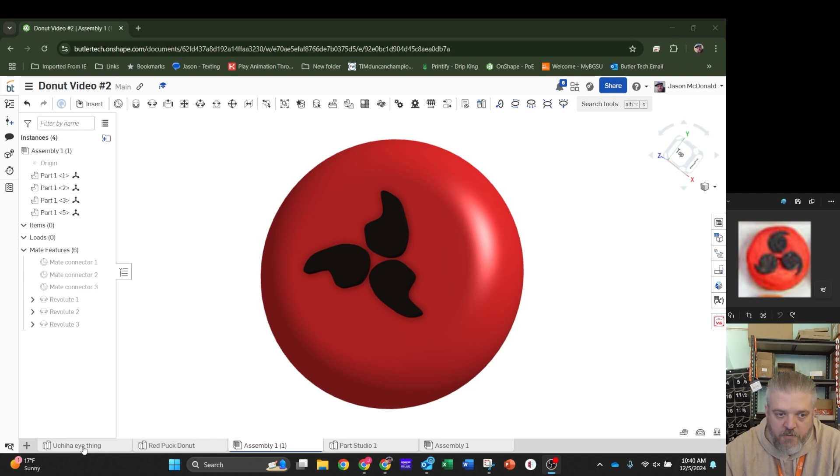So, as you can see in the picture here above my head, we've got the example donut. And this is what it's going to look like. So hopefully at the end we get there again. So I've copied some of this student's parts over, but I'm going to walk through how to create the eyepiece. The donut itself, pretty simple. It's just a circle extrusion.

So I'm going to start with a new part studio. I'm going to go from the top down. We're going to walk through the image trace with a real example here. So sketch, top face, go to the image, insert image feature, import, I got a bunch of stuff, download, brought in the picture of the Uchiha eye donut, probably butchered the pronunciation of that, apologies.

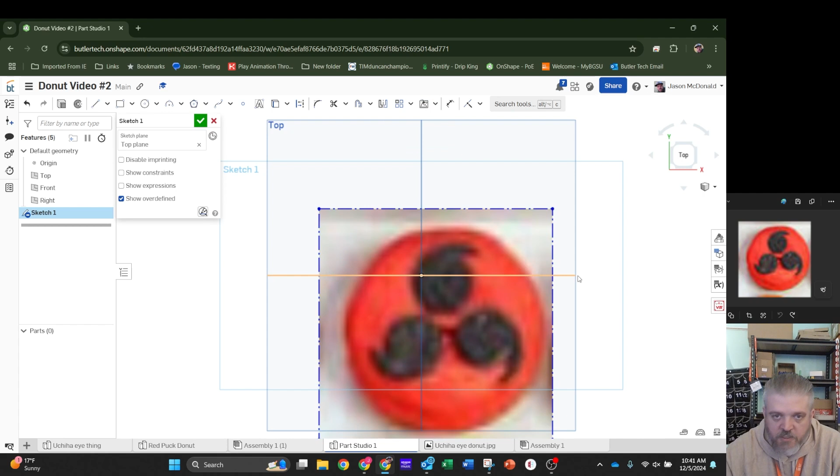I'm going to click on the image now that it's in. I'm going to get rid of this little information. Now it's asking me to draw an image rectangle, so we'll draw it nice and big. It's a little blurry, not really worried about that, I just need something to sketch. So that's in my first sketch. Now I'm going to create another sketch on the top plane. And now I'm going to trace my shape. So in this case, I'm just trying to create the little black eyepiece.

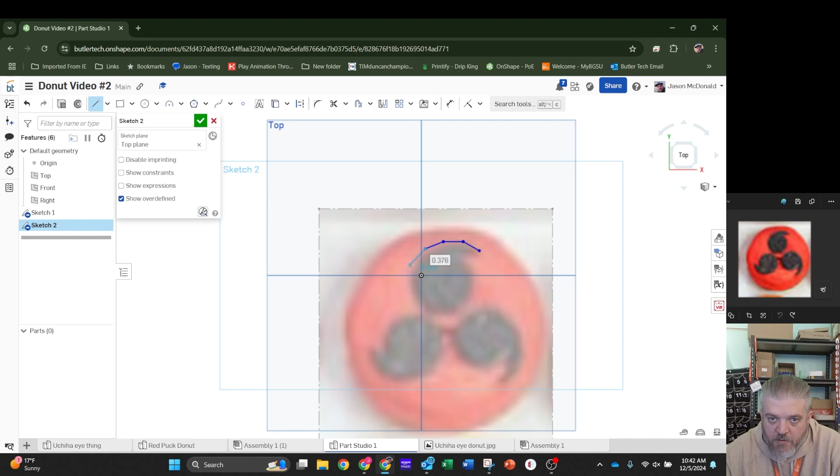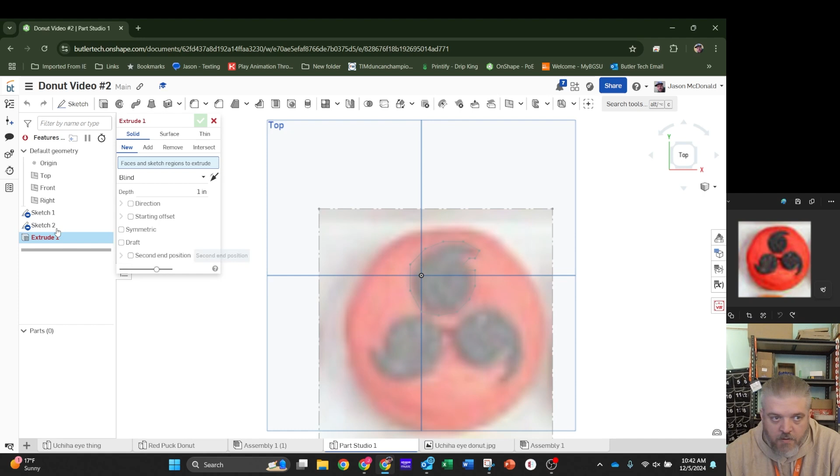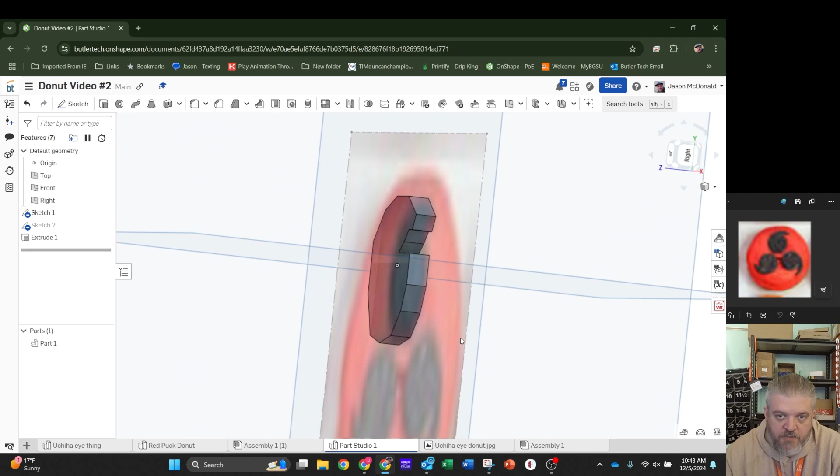In this case, little piece. I can add appearance to it, make it black in this case. So, kind of gives it the shape. If I wanted to make it a little bit better, I could use different shape tools. I could sketch again on the top face. A lot of this is round, so let's start with a 3-point arc. So we got, kind of starts here, goes over towards here.

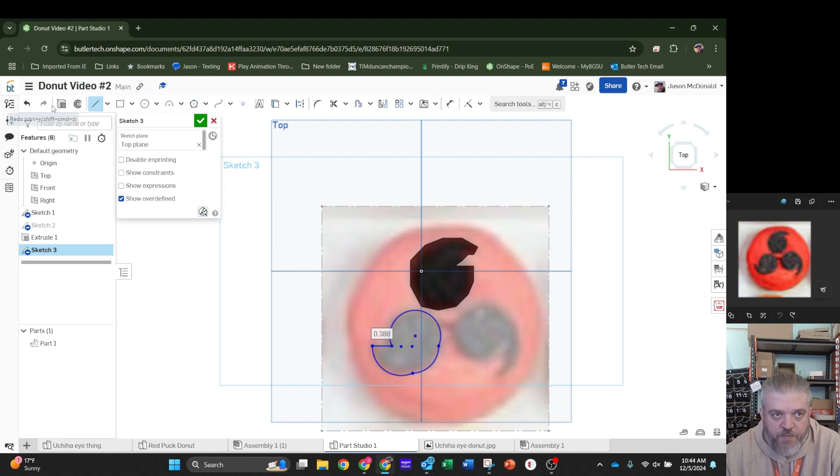That's pretty good. I've also got kind of a 3-point arc that goes from here, say to here, and then this little bit's a line, then extrude that. Again, you get the general gist.

So the darker the picture, the better the picture, the easier it is to trace. You know, I could probably smooth that out a little bit if I took some time and really got into it. But that's the purpose of the image insert, and then using the lines and the different sketch shape tools to kind of make that. I could have created a circle since it's a circle, and then maybe created the rest of it. I could have used the spline tool, etc. For our case, I'm just going to leave that.

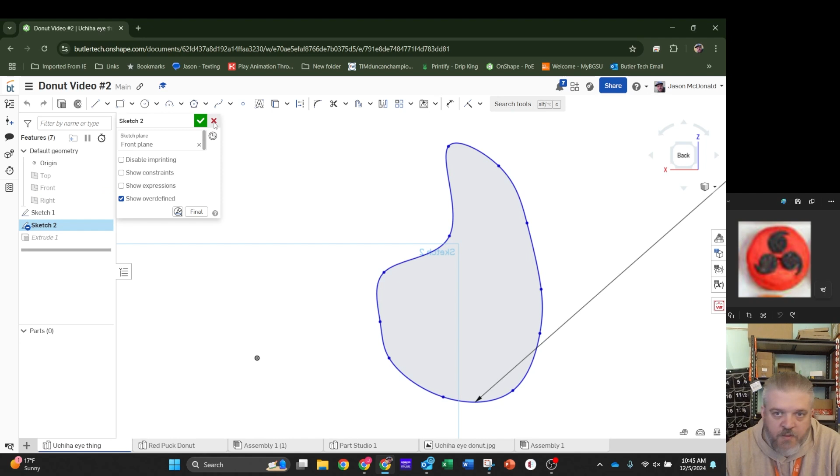I'm going to use our student's one that he drew. You can see it's got a little bit better shape probably than mine. Looks like if I click on his sketch, he did some lines and some splines to get there. So did a nice job. Alright, so that's the image trace.

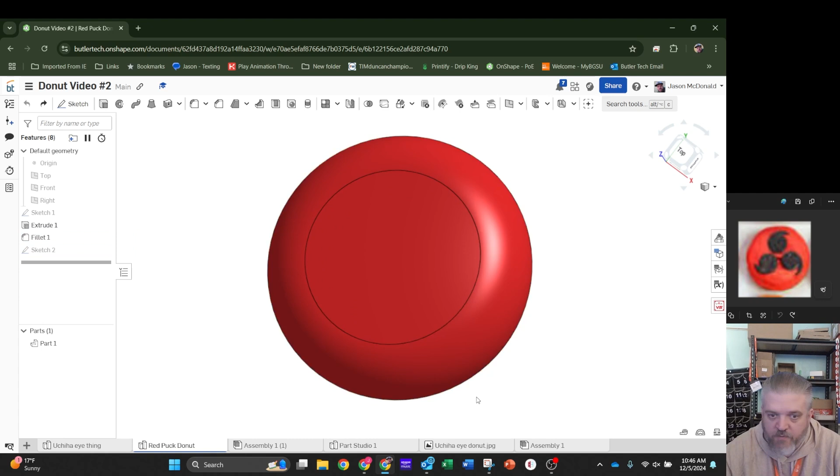Alright, red donut. So in our example here, we've got our red donut. You can see it started out as a circle, has a little bit of a fillet to it on the edge. All tools you've seen before. If we just want to run through it real quick. Create a new part studio. Again, top down, sketch, top, circle tool. None of this should be new for y'all. We're going to go 2.5 inches just to give it a shape and a size.

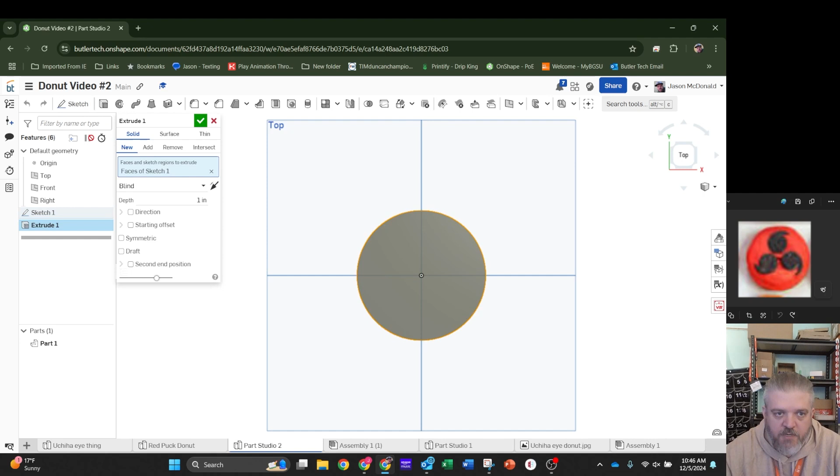We're going to extrude that to give it its 3D dimension. We'll go 1.5 inches. Make it look kind of puckish. There we go. And then to give it the rounded off, we're going to fillet or fillet the edges. I hear it both ways. Doesn't really have quite that donut shape right now. It looks more like a hockey puck.

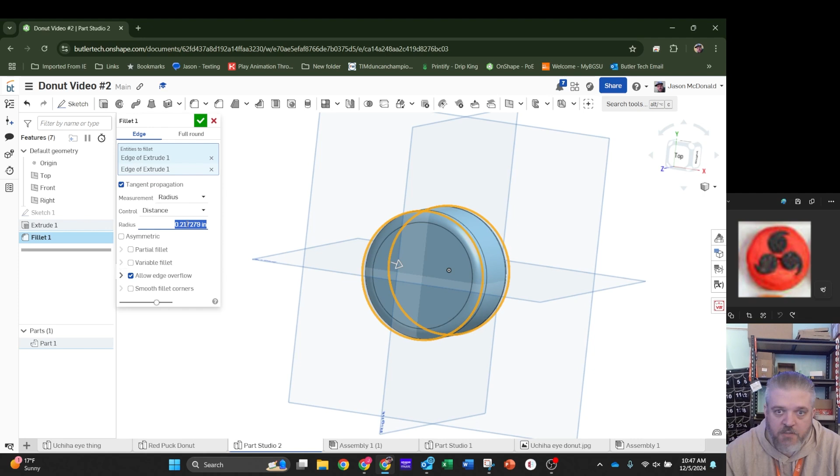So if we go a little bit bigger, the donut was 1.5 inches. So if I go 0.75, let's see what that looks like. Might be too big, or you know what? Give it a.

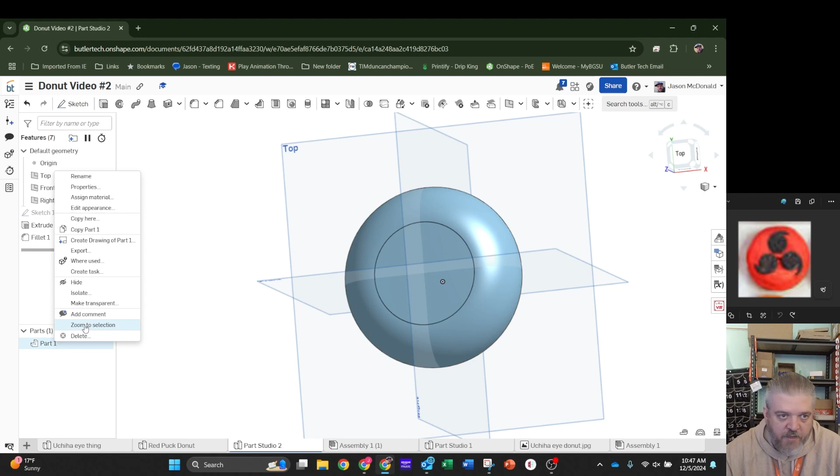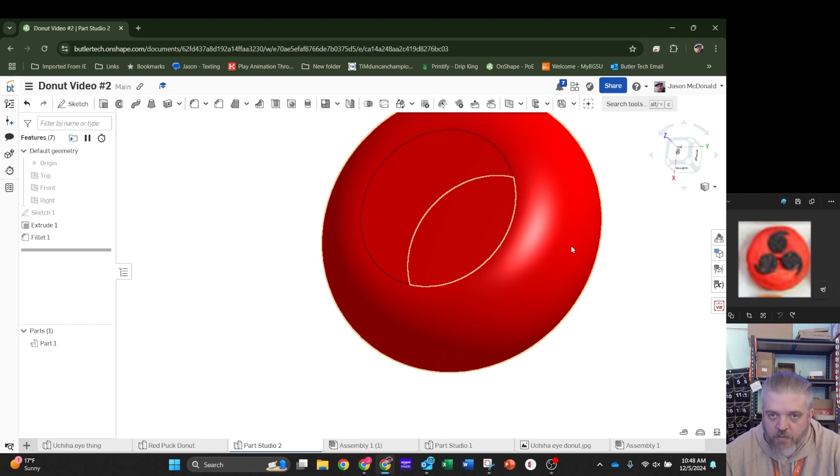So one of the questions I also get a lot is, hey, I'm trying to add this to my professional looking presentation. And while this is good for CAD, seeing the different lines and parts of it, how can I, one, either view this as an isometric, or view this without the lines between the different faces or components or features, the different geometries? We have this button right here, our camera and render options.

So one question I've gotten a couple times this week, how do I make it look isometric like when we were in our notebooks? So that kind of spins it to our XYZ isometric view. Now since I didn't really create it in a good fashion for an isometric view, maybe you might want more like that or like that. Still got to 3D spin it, or use your right click and spin it around.

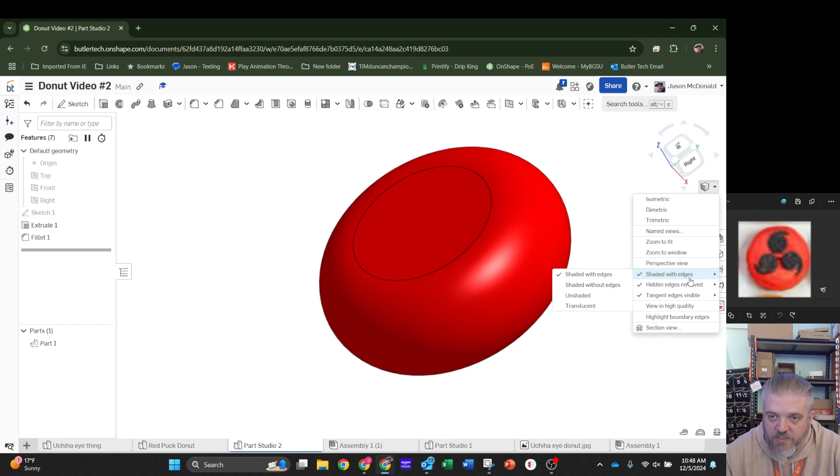In order to get rid of these lines and make it just a solid shape, if I go into render options, I can then go down here to where it currently says shaded with edges. If I go shaded without edges, it gets rid of those lines.

Alright, I'm going to pause here for a second and I'll be back in a minute.

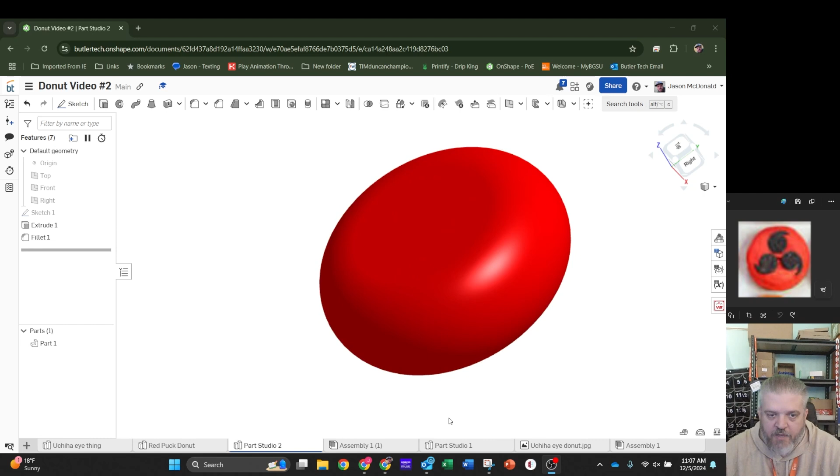Alright, I'm back. So the next part of this, we've got our red puck, we've got our black eye piece that we need to add to it. So how do we go ahead and get it on the donut? So I'm going to go to our assembly tab. We did something similar to this with our puzzle cubes earlier. So I'm going to create the red puck donut, drop it in. We're going to add in our 3 eye things.

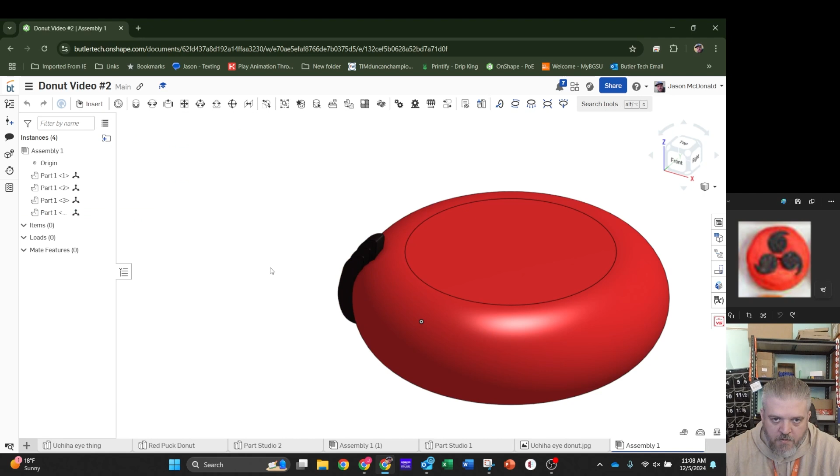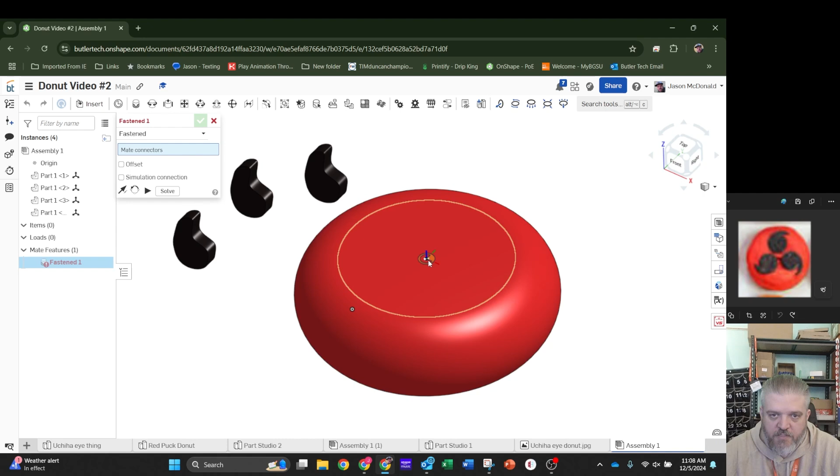So I showed this the other day, how to add mate points. But here's kind of a real world example. So in this case, this face here, which is where we're looking to add our eye things to, so we can get the shape that's above my head, only has 1 mate point right in the middle, as well as on the edge. So if I were to try to mate it, I'll just click fasten mate. If I click on here, you'll see just the 1 mate point in the middle of it.

So one thing I do want to call out, we're also going to learn a new mate with this. So there's fasten mate, which is what we've used before. It removes, like it says there, all degrees of freedom between 2 entities. So if I add that eye and put it on the face of that donut, they can't move. So wherever it goes, it's stuck.

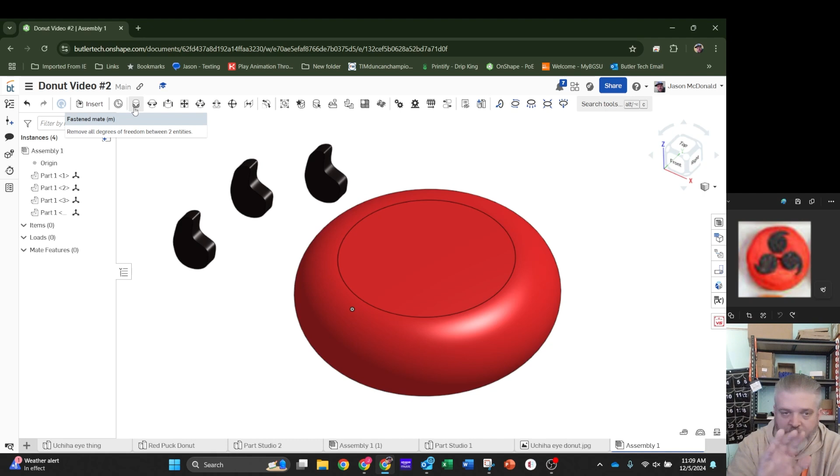Now say when I add it, I want to spin the eye a little bit to give it that 360 kind of spinning wheel image that's above my head. What I want to use there instead is right next to it, this Revolute Mate. And so that allows, again, what it's saying, rotation about the z-axis. So putting it in, it spins across the face of the donut so you can line them up.

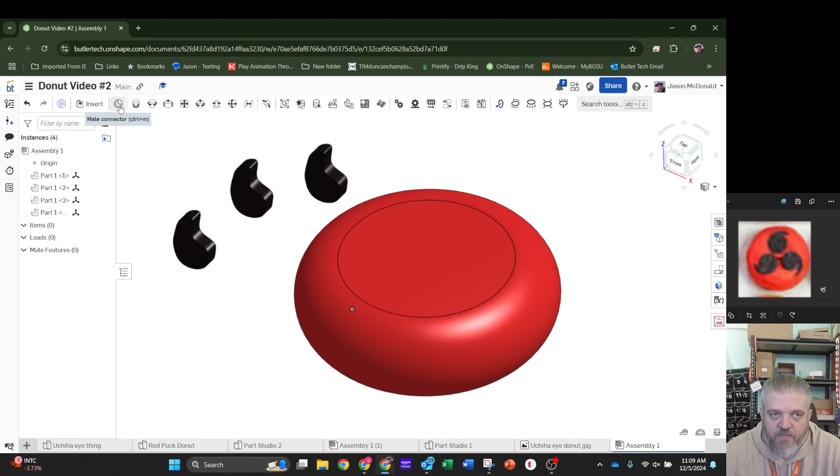So we're going to be using this, but first we also need to add our mate connectors. So I'm going to want 3 of them on the face of this donut, so I'm going to spin this to the top. I've already clicked my mate connector button. I'm going to do it on the entity, which is this face here. On entity. There we go. Sorry, Onshape's going a little slow today. So on the face of part 1, I want to move it.

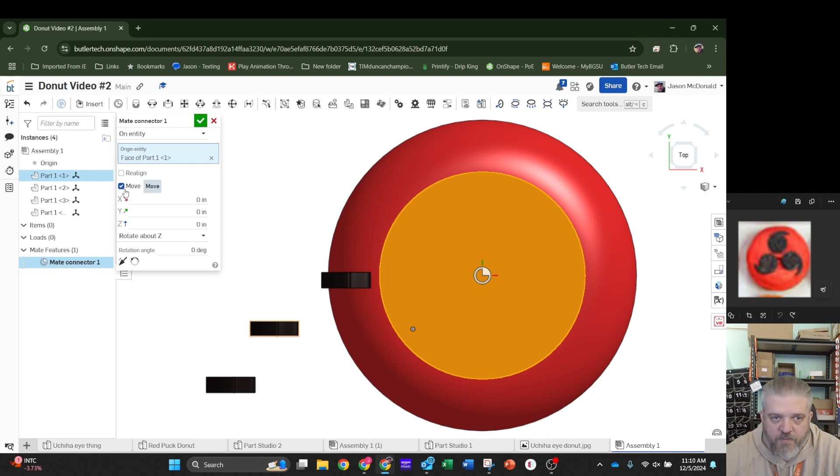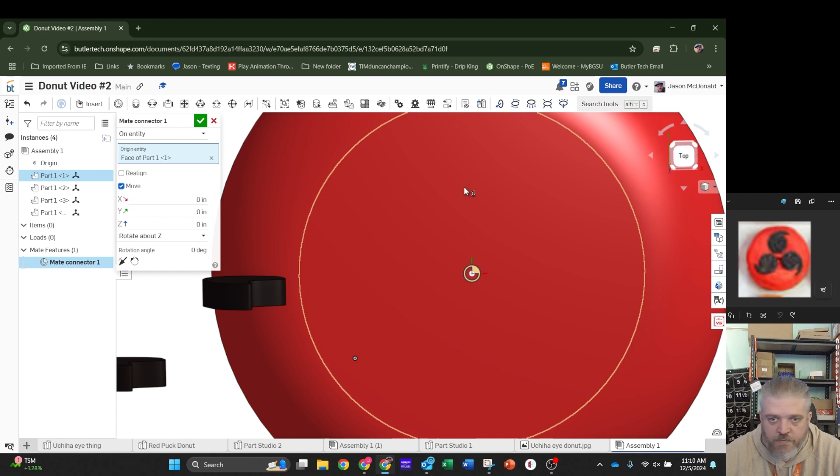So again, it's hard to see because I've got a red donut, but our x-axis is the red, our y-axis is the green. You don't see the z because it's coming straight at me, but if I were to spin it, you get a little bit of it. So I'm going to put this one kind of out in here. Or no, we're going to go straight up for the first one. So straight up the y-axis, we're going to just try 3 inches.

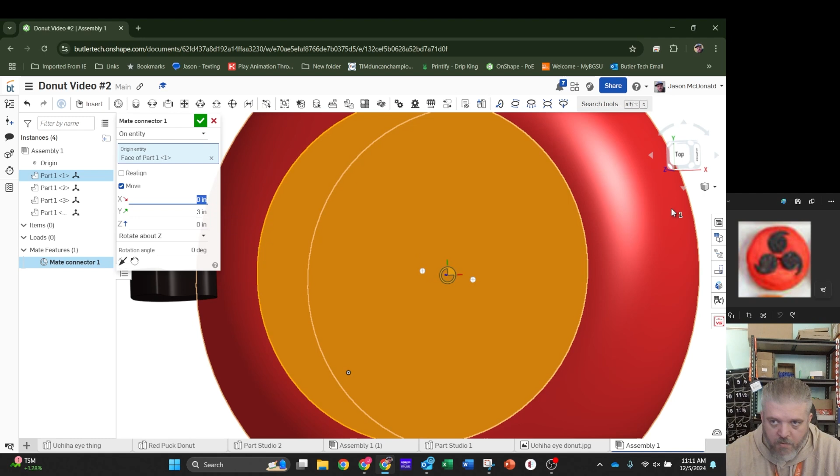There we go. Try 0.3. Let's go 0.5. That should probably be a little bit too far. We'll go 0.4. So that's 1. Let's add a second. Again, on the face.

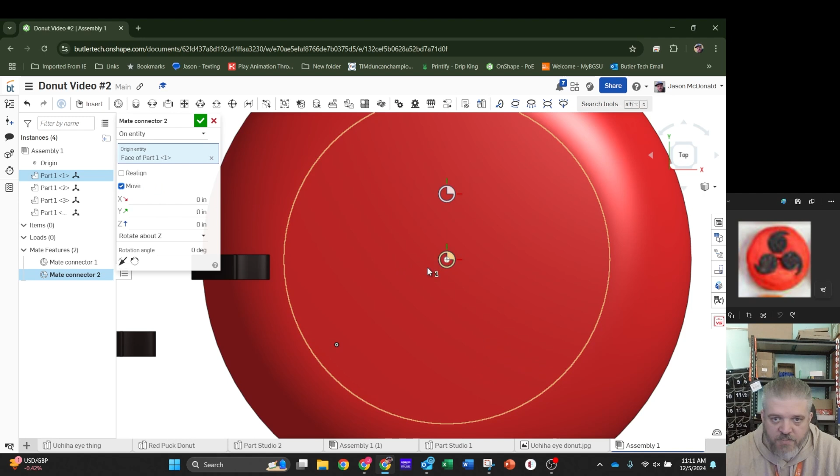Not on the edge, we want it on the face. Face of part 1. I want to move it, so this one's going to go down in this direction. So we're going to go negative 0.35, and we'll go negative 0.35 here. Probably good for now. We'll go ahead and green check that.

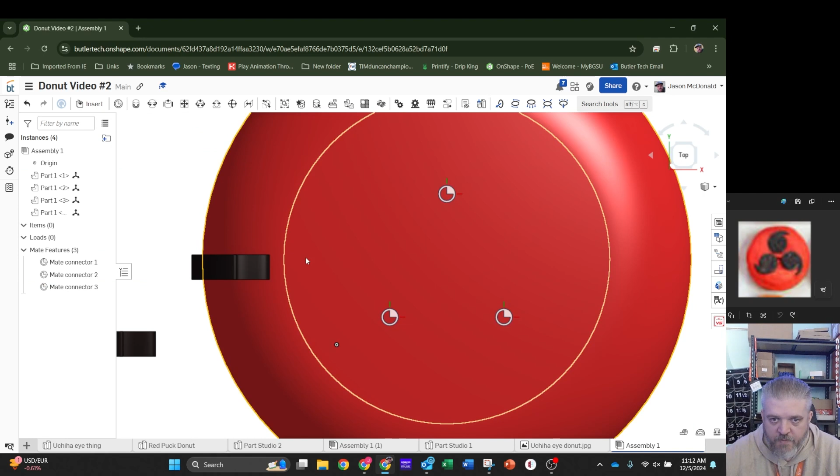Add another one on the face. Move. Again, down a negative 0.35. In this case, we're going to go 0.35. Probably good. Alright, so now we got our mate points on the face of the donut. We're going to see if this worked. So we're going to Revolute Mate this time. We're going to go face of the donut, side.

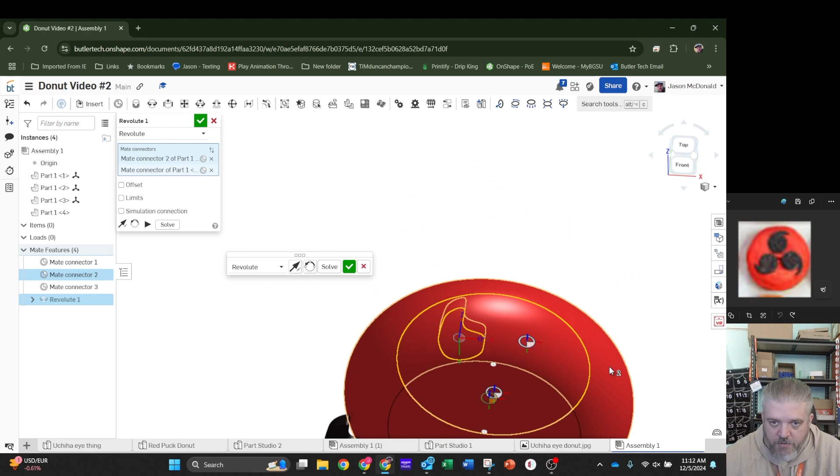Since we can't see it, it went inside, we're going to flip that out. Again, hard to see. There we go, and we're going to green check it. So now if I bring my donut back, we got one locked in place.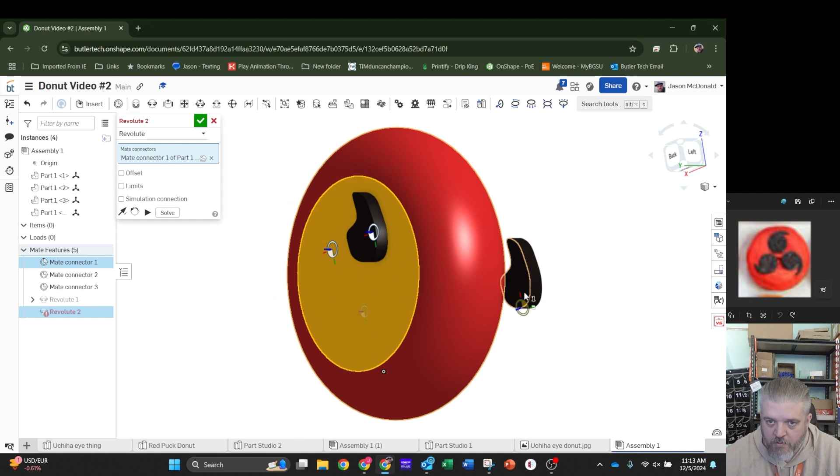We're going to go ahead and do the second one. So Revolute Mate the second one with the face of that donut, or the face of that eye patch part. Get them to where they stick out. There we go. And now Revolute Mate 3, where's part 3? Hard to find. We'll find them here in a second. Right in the middle of that circle.

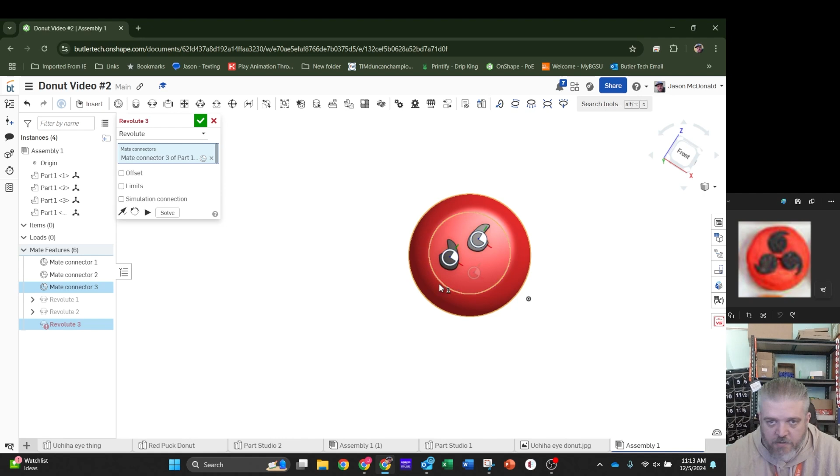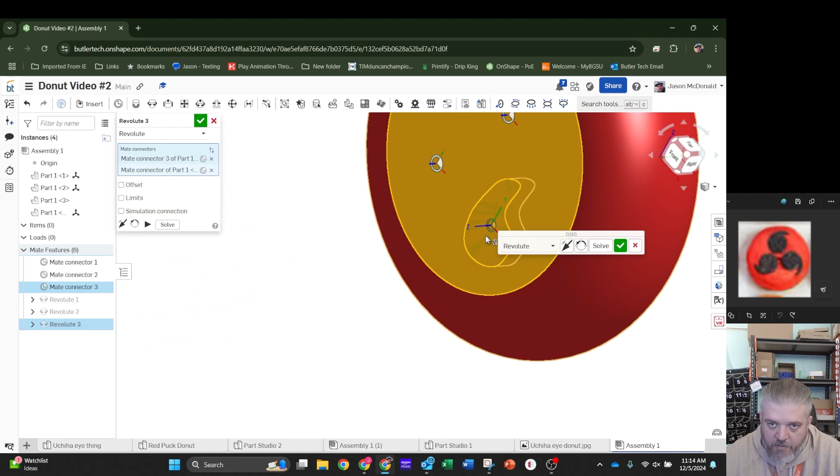And what? He's inside the donut. Alright. Let's red X this. Let's move this donut out of the way so we can get to him. Revolute Mate. Click there. Click in the middle of the donut, or the middle of that part. Flip it out so it's visible. Green check. Alright. We're getting closer.

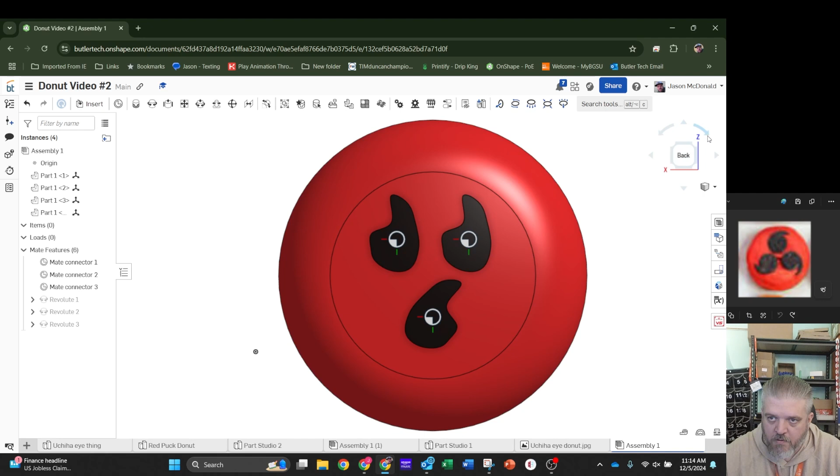So, we at least have them all. They're all connected, but they're not in the right area. This middle piece kind of goes towards the inside, and they all kind of face outwards. I've got it upside down, so let's rotate this. One more time. There we go.

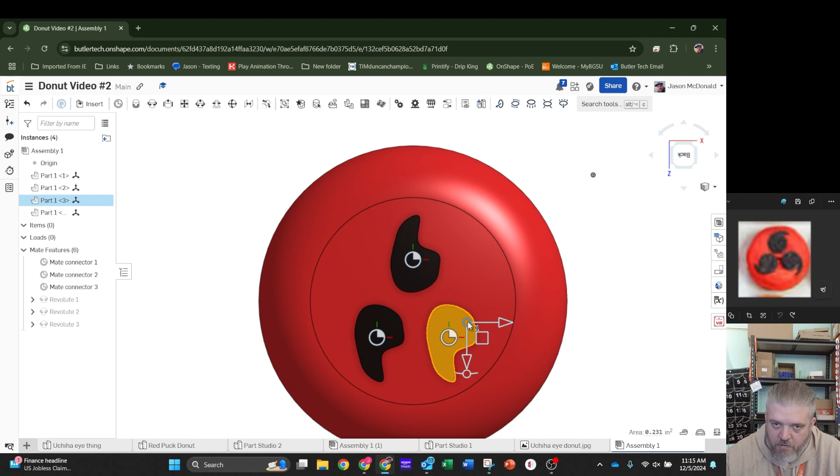So if I now click on the individual part, I get my white arrows. I can now transform it. This one kind of looks more vertical. And last but not least, this one here.

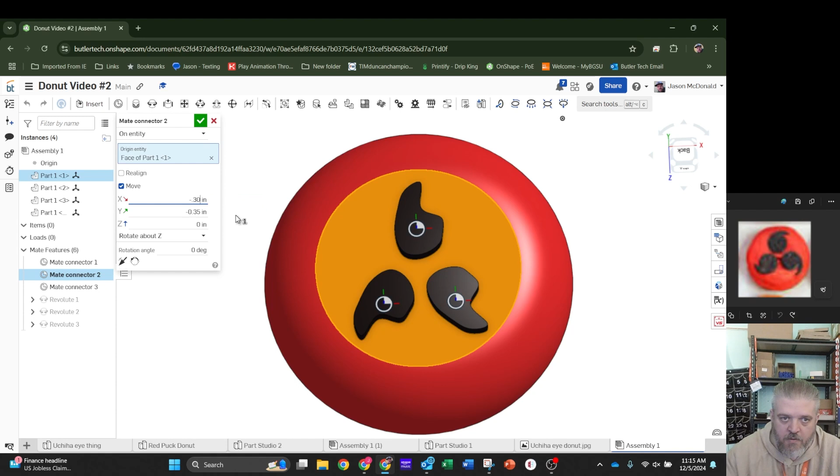There we go. Now for whatever reason, I didn't like exactly where they lined up. Maybe I wanted to move them a little bit. If I just go back to the original Mate connector point, so say I wanted to move that top one down a little bit, or if I wanted to move this one up a little bit, I can just change this. Bring them in a little bit closer. And then because I did the one, just to keep it symmetrical.

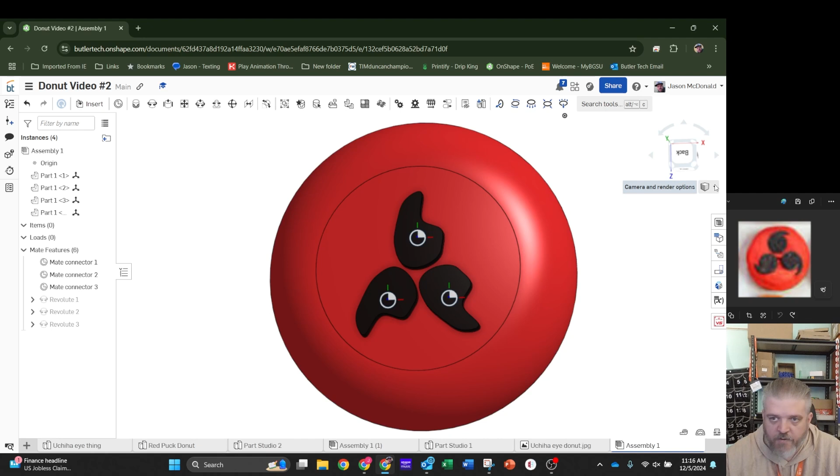I could do like that, and then at that point maybe the top one's off a little bit. So instead of 0.4, change that to 0.3. And then if we wanted to get rid of those lines again, click on the rendering options, shaded without edges. And there we go. We got our red donut with our 3 eyes.

And we can go back to the Part Studios and change dimensions a little bit if we want to make the eyes bigger, the donut smaller, to dial it in just a little bit better. But as it is, great donut, great choice, very nice job.

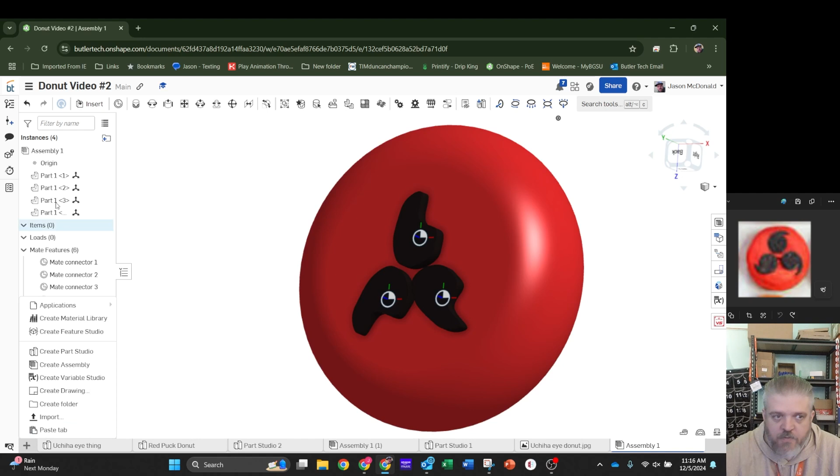So, last skill to show. One of your students today asked about how to create a cone-shaped donut. So I'll show this again. This is the skill we did with our D&D or tabletop dice. So pretty quick. Like always, start a sketch, go to the top, use a point, make a point.

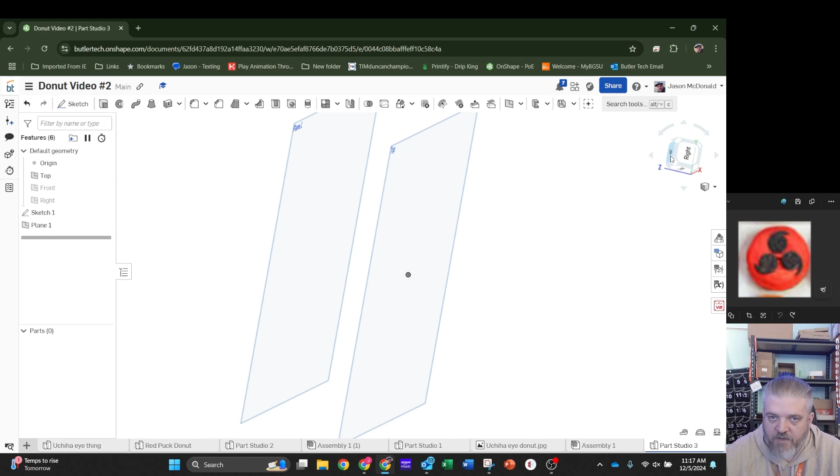Done with that plane, we're going to create an offset plane from the top. We're going to make it, in this case, 2 inches. So now I've got 2 planes. I'm going to hide the front and the right. So now if I click on the top, give it that top-down view again, create a sketch here on plane 1.

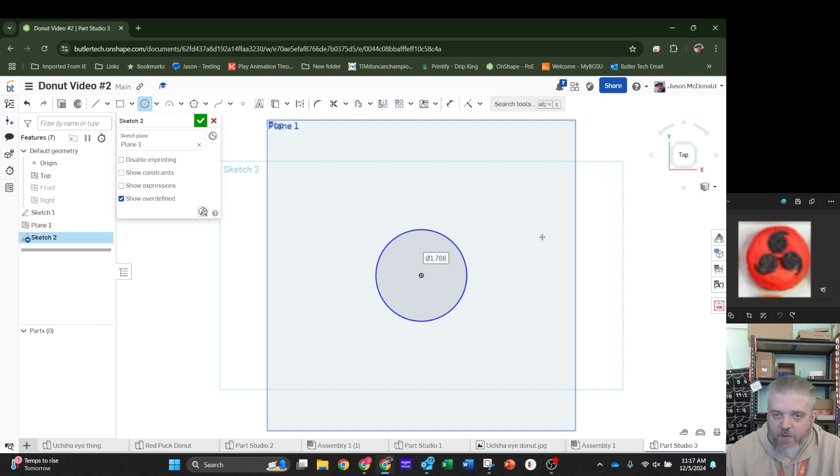In this case, a circle. Since it's a center point circle, I'd start right at the origin or right at the dot that I created for the first one. Say I want the top of that donut to be 2 inches, I can just drag it out. Right now, while the text box is there, type in my 2. Got a 2-inch donut, so now I've got a point and a circle on the other end.

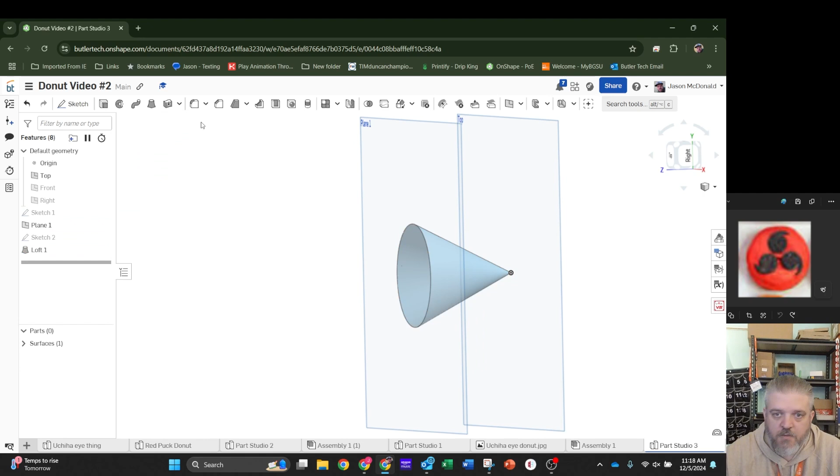Done with my sketch. Now I'm going to loft the two. Loft from the dot to the circle. Could have gone in either direction. As a matter of fact, I ended up going the opposite of what I just said. There is our cone shape. Oh, and I lofted that as a surface, not as a solid. So let's do it again to give it that solid view.

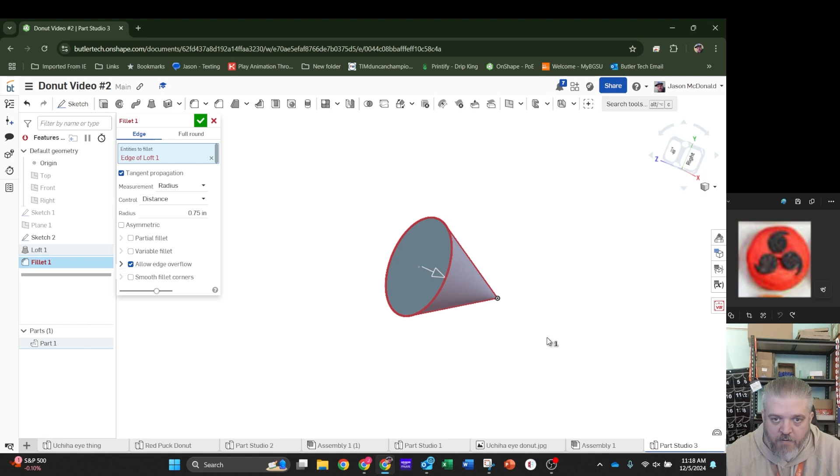Now in this case, again, making a donut. Let's hide our planes. Want to give it that rounded filleted edge. Round. Hide that sketch, there you go. Got a kind of a rounded donut shape there.

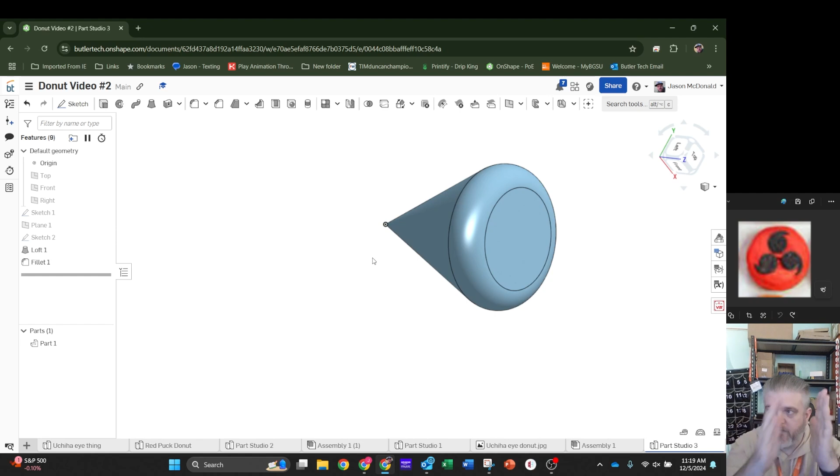So it's as simple as making a circle and a dot on two separate planes that are offset from each other, so they're still parallel, both centered on that same dot, lofting them together, and then like all of our other donuts, using that fillet tool to give them that nice rounded edge.

So there you go, walked you through quite a few tools here. Revolute Mate, did some image trace to get those eye shapes, did a loft, created new Mate points, moved them. I didn't do rotate, but I did rotate some in the last video, so if you're trying to add sprinkles, remember that was in video 1. So there you go, video number 2.